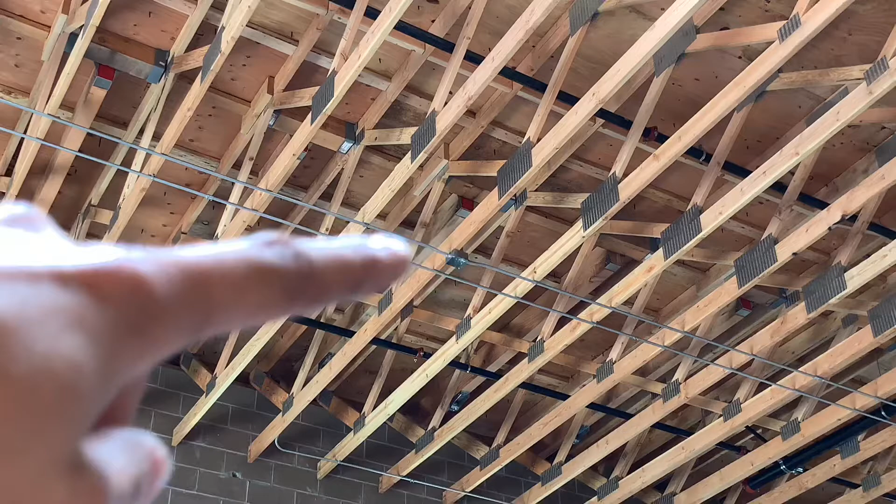I ran a pipe from here to here, and these are going to be for the outside lights. I did one there to there. So one from the top of this box, I went up, down and around, and then went out from this box over to that outside light, and then out of that box to that outside light.

Because that's the emergency box, I had to come from the normal lighting over, then hop over, and then I took the normal power up and over the truss into the room over there, and then the emergency one up and over the truss into that room as well.

I feel like that's all I did today. Super fast day, went pretty well, except for the part where I mounted the box right there because I thought that hole was for me. So I just had to take the pipe off and extend it 10 more feet over there. That's really the only thing I messed up on because I assumed that was for me.

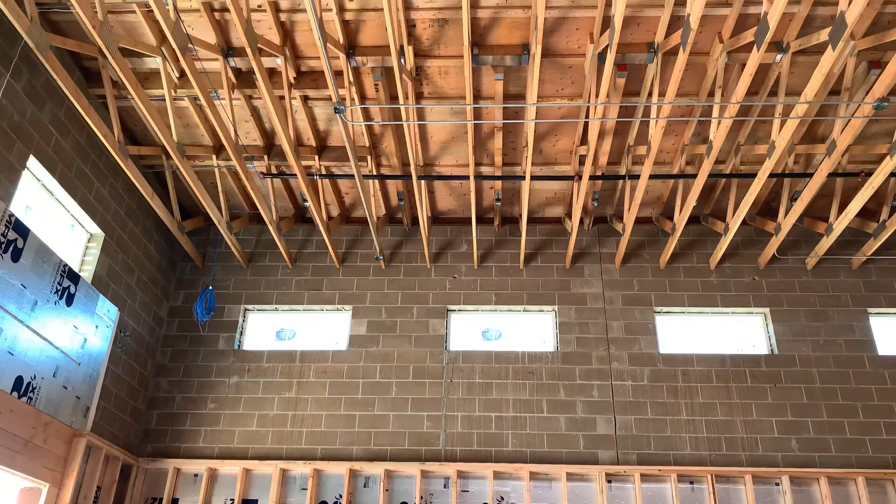So just another lesson, stop assuming things. If you don't know what you're doing, just ask. Would have saved me some time, but other than that, it was a really good day.

And oh, I also did this pipe right here, just started to go around the corner down there. It's going to go back to the panel, and that's going to be for a giant 16-foot fan right here, hanging down or whatever. So I just have to finish the rest of that whenever they decide to.

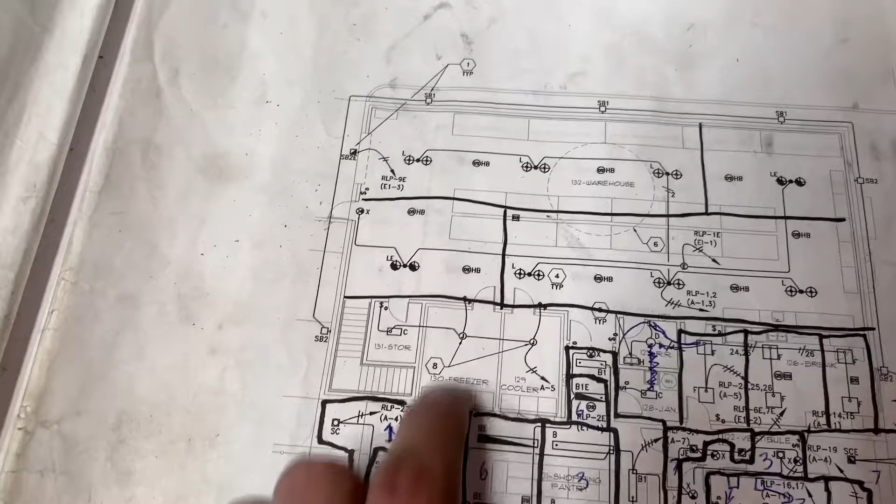So for the most part, I think most of this is done. I'll try to show you the print. So this is kind of what the blueprint looks like. This is what the light fixture looks like. There's two lights and one box or whatever, that's the design.

So one light there, one light there, one light there, which is how I have it right there. That one's tied to that one, that one's tied to that one, there. And then it jumps across over to there, and then it goes one over. So that's the normal lighting.

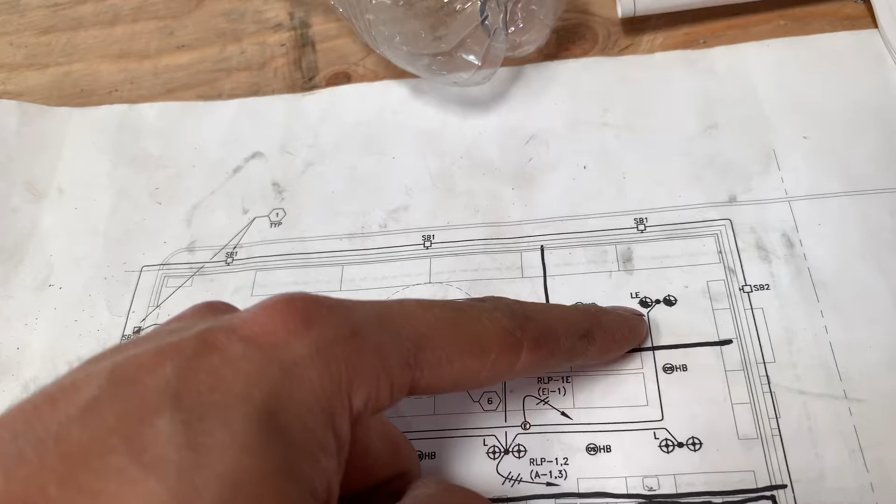And then you've got the emergency lighting right there, which is tied to there, but I ran it this way around there. And then I just took both of the powers, the emergency one into this room, and then this regular one into this room.

And then, so this lighting, I just tapped off of there, and then tapped off of there, and then tapped off there, and then back out of there.

Yeah, so I still have to do this one, and this emergency one has to come around, and then another normal one back over here. So I just have to figure out how they want to do that because there's stairs right there, and this goes into the room, so I'll probably have to come up and over the rafters over there.

Anyways, that's what I got going on here. So there's the big 16-foot fan. I'm not sure what the rest of this stuff is. That's occupancy sensor. I'm not sure what the HB stands for, but it's occupancy sensor.